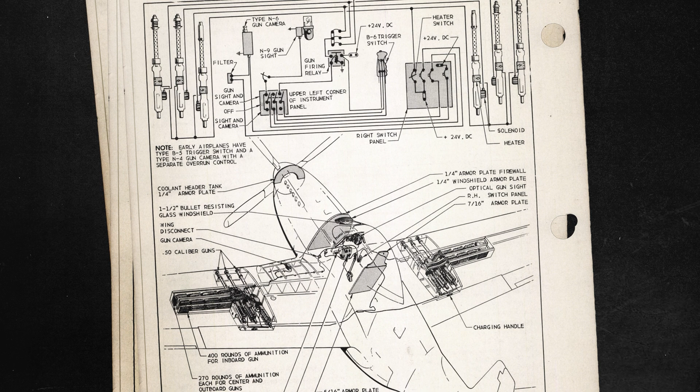Let's start with the electrical system. The airplane has a lot of instruments, components such as the engine starter, all of which require electricity to work properly. To keep the player interested - wow, the light bulb turned on or off - we created an electrical system, not in the way where an engine starts and a power variable is automatically set to true. From the perspective of the new system, these are the components...

Power source, such as a generator or battery, which can be damaged separately. Consumer, which can also be damaged separately. And the connections, in this case the wires between these elements, which can also be damaged and affect a specific consumer or group of consumers. Or if this is the only wire, so to speak, from the generator, then the whole system shuts down.

Is the power system implemented as some kind of logical network, or does it have parameters like voltage, etc.? The system is now designed so that it can be made in its simplest form as a set of logic, on-off. It's very convenient for AI aircraft, so they don't have to model the whole system with currents, voltages, voltage drops, ohms, Kirchhoff's laws, and so on. The same goes for real voltages, with actual consumption corresponding to the load on the power source, the generator.

Voltage drop - light bulbs can dim when there is insufficient power supply. And we will have that? Yes, we will. Well, let's probably talk about everything - it might take too long.

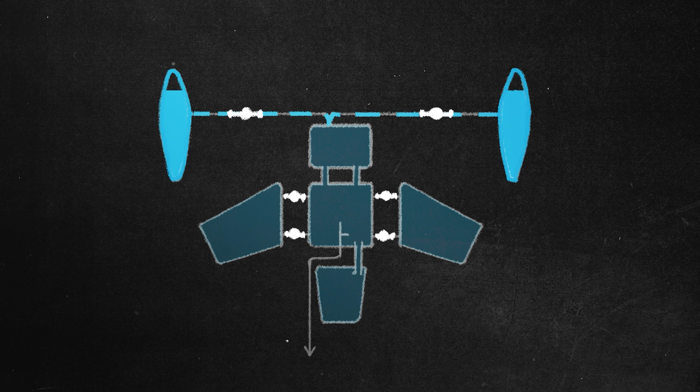They may be introduced - we'll see how much control we want to give the user. Additional valves will be introduced to transfer fuel from tank to tank, so that if a fuel line from any tank is damaged, it can be isolated and fuel drawn from another tank. Let's call it fuel management. But pumping fuel - we didn't have that feature yet. There are also external tanks that can be dropped.

That's for sure. Also, there's a point where the new jet engine will have some kind of fuel system, and we also plan to develop that equipment. It's almost ready, but with the introduction of the system, it just needs to be put together.

Here's a little topic we want to discuss: modeling versus animation. There's an approach we used a lot at Great Battles, especially with starting the aircraft, where your start process matches what it should have been according to the flight operations manual, but it was largely an animation. For it not to be an animation, it needed systems.

So what's the benefit of modeling a detailed system in that sense? Detailed modeling leads to features that happen naturally in life happening naturally in the game. That is, there's no need to program it separately.

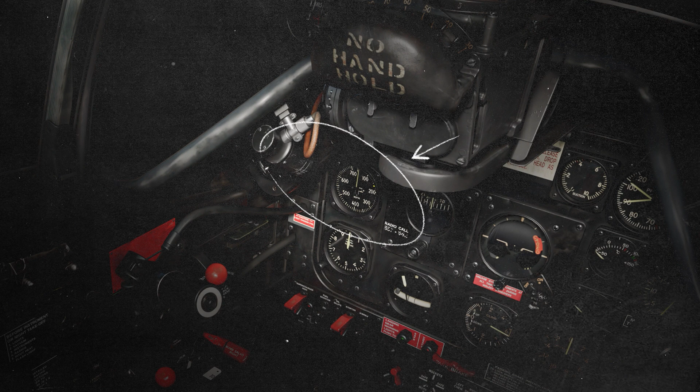The most important instrument is the airspeed indicator. The pilot must know the speed at which he's flying to ensure the airplane doesn't stall or spin. However, this instrument is tricky because it has a margin of error, and that error depends on the speed, specifically the angle of attack. It's important to note that different planes will have different margins of error.

Usually because of this, the training chart is then adjusted to the aircraft. So when we model this device more accurately, we can use this training chart to help our airplane hit the references more accurately.

We're going to talk about how we see the evolution of this whole story as it relates to the systems. I think a lot of users like to fiddle with different knobs and buttons, and if we complicate the systems, we can create more so-called controls—switching things, turning something on, seeing how the system reacts, and saying wow, it works. That increases the interest of users who want to see more of a cockpit simulator than just a game. But at the same time, I hope we don't make life more difficult for people who just want to play the game. We want to keep the balance so that everyone likes it, without going into too much detail.

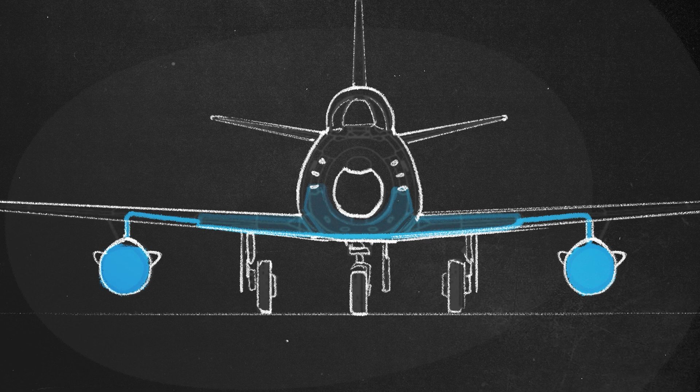Regarding the fuel system, probably an additional question: will the player be able to control whether fuel is consumed from the external or internal tanks? Yes, of course. We're going to give the player the ability to turn these fuel valves, not just the ones that are turned off because there's no fuel, but to actually choose the tank—so we'll have consumption from, say, the left wing tank, not the right wing tank.

We definitely have a lot of features planned, but will we make it in time? Well, let's just say that about half of it is already done on our end.

Okay, since we have a little bit of time, let's talk about combat damage. For example, let's take the hydraulic system. How will the aircraft behave? Everything that has to do with the operation of its hydraulic system in the event of a puncture in the fuel hydraulic line.

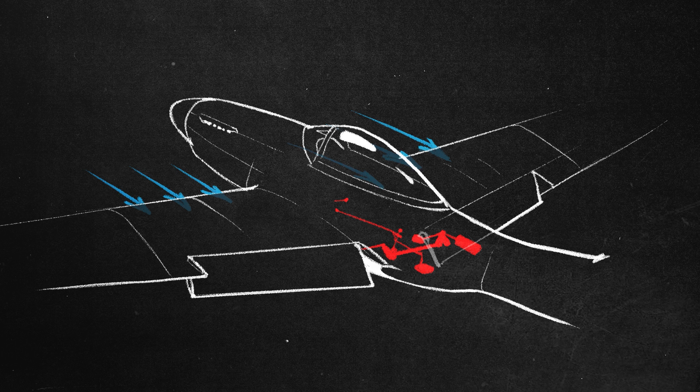Most likely, if its flaps were down and we damaged the line that deployed and retracted them, then the airflow would probably retract them to some degree. So now we might have some problems during landing.

If we have broken the main line responsible for landing gear retraction, then the gear will not be retracted by the hydraulic system. However, there's a feature, already implemented in some aircraft, where if the landing gear is not locked in the retracted position, it will just fall down. If there's enough force, the energy of the landing gear falling out will lock it into the deployed position. If there isn't enough, it won't lock, and you could have even more problems landing.

And if we can shake the plane, can it help? Of course, we can shake, roll, wiggle, and the landing gear will lock, and all will be well.

Regarding landing gear deployment, we're sure to be asked, will there be an emergency release? Yes, I think we're going to do an emergency release, but I don't know if it's going to help from a hydraulic system perspective if we have a single line that's broken and we can't do anything about it. Whereas there are aircraft that have an emergency release implemented with, for example, a pneumatic system.

Yes, if you blow air into the hydraulic cylinder, even if there is damage, it could save us because there is a reserve of air and the pressure is also given with a reserve.

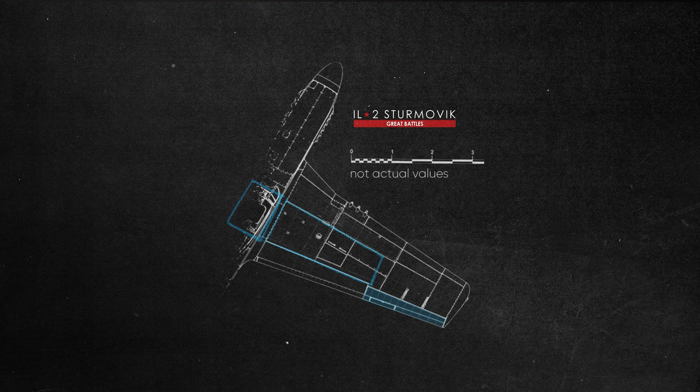It's important to say that even in Great Battles, there was interference in the rods and levers, in the control channels, just like I said before. Statistically, it works: if you hit the part of the wing where the control wires run, then with some probability, depending on the angle of impact, the wires will be damaged and the aileron starts to wobble. In Korea, the main difference will be that a separate collision object will be created for the control wiring - a specific section that must be hit directly. There can be several sections.

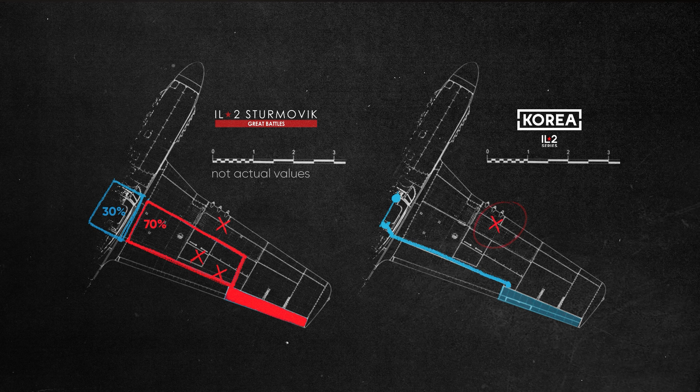All right, next question. How would you describe the evolution of approaches to modeling all the various aircraft systems, starting with our first title, Rise of Flight, and then through all the titles of the Great Battles series, and now with Korea? I would say that in Rise of Flight, there were some rudimentary systems. There were very few, they were not connected, and they were scattered - just animations of the necessary devices.

In the Great Battles series of titles, as the airplanes became more complex, more detailed systems were required. And with each airplane, as those systems became more and more complicated, we had to come up with new ways to somehow do it. But again, without much systematicity, let's say.

And now in Korea, we have finally reached the point where we have created a unified and organized, integrated system - how to build such systems, how to easily string a chain of a large number of elements, create a complex system that can be controlled, in which individual elements can be damaged, the connections between these elements, and so on. So we are getting a substantial qualitative leap in the development of the foundation, and this allows us to create such complex systems.